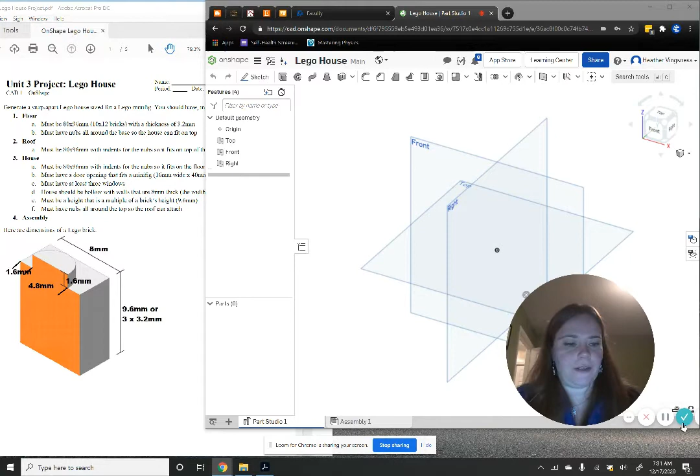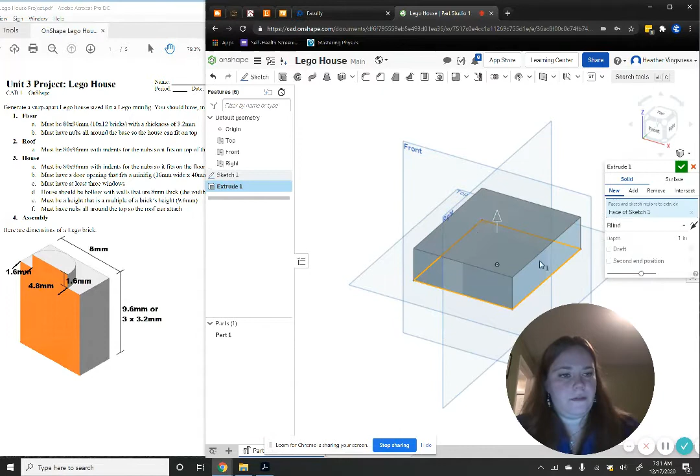We're going to start by building the floor of the Lego house. I'm going to create a sketch on the top layer of a center point rectangle. It has to be 80 by 96, which is 10 bricks by 12 bricks. So I'm going to type in 80 millimeters and 96 millimeters. It should be a thickness of 3.2, check. I'm going to extrude this to 3.2 millimeters.

It looks like my drawing is set in inches, so I don't have to type in millimeters each time. I'm going to change my units to millimeters.

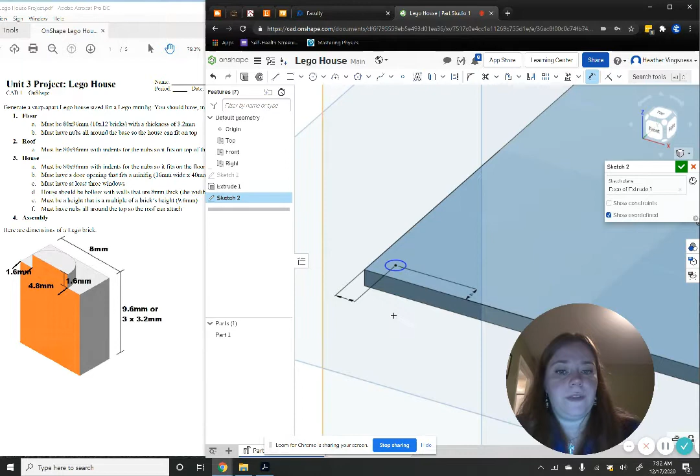Next, I want to create a pattern of nubs. So on the floor, I'm going to draw a circle. The Lego piece is 8 millimeters by 8 millimeters, which means the circle I drew needs to be 4 from this side and 4 from this side. That way it's evenly spaced in the center of a hypothetical nub or Lego piece. The diameter is 4.8 millimeters.

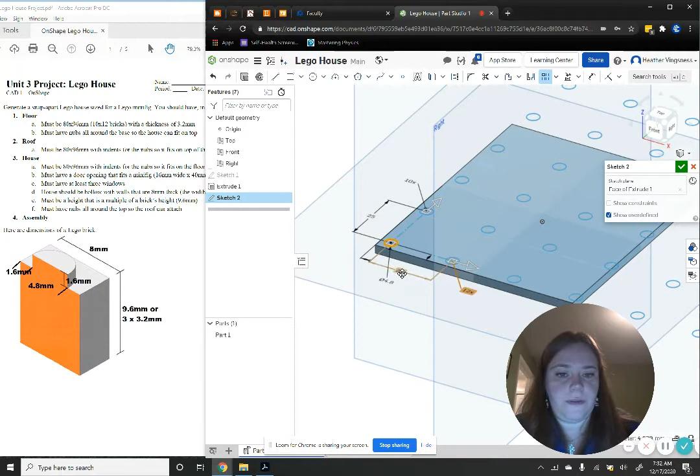Lastly, I can create a rectangular pattern of this part. I want to have 10 of them this way, and 12 of them this way. The distance between them is the width of one Lego brick, which should be 8 and 8. Oh, it looks like I swapped them. This should be 12, and this should be 10.

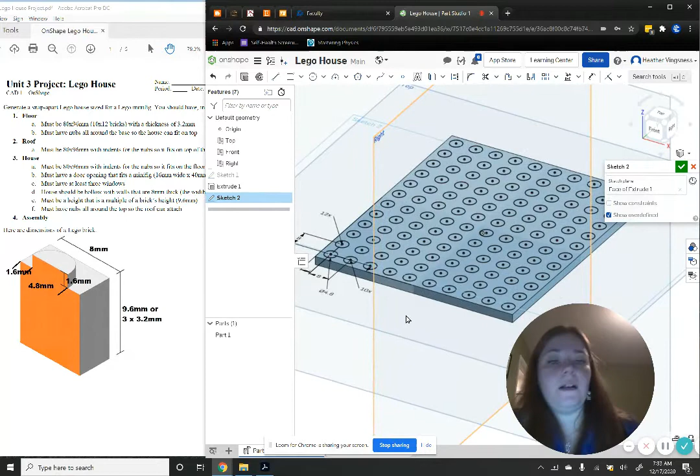So I don't need all of these nubs, only the ones on the outside. When I click to extrude, I don't want to extrude all of these. I'm going to X out of that. I want to click only these. Hold tight while I click all of these. If something happens and you accidentally click the whole sheet like this, all you have to do is X out of that most recent one. You don't have to start over.

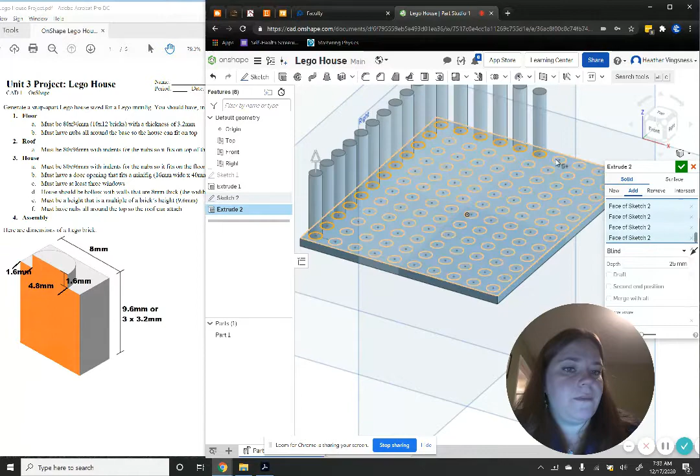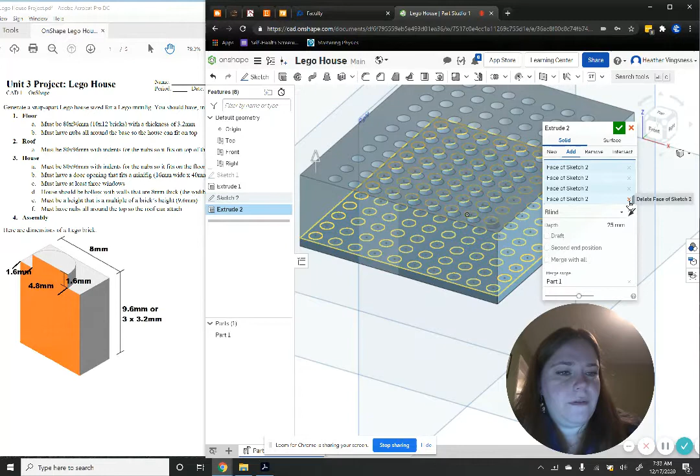See, I did it again. X out of that most recent one. Come on. There we go.

So all of these nubs are going to have a height of 1.6. Check. There we go. The floor is done. I'm going to rename my part floor.

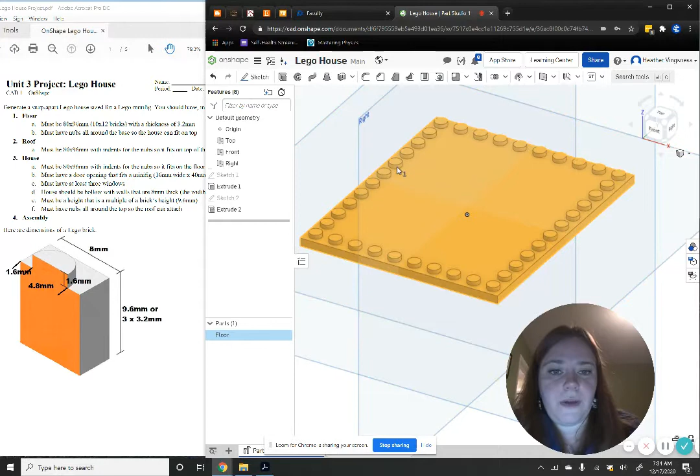Next, I want to build my walls. I want the walls to fit perfectly on top and have the same indentation pattern, so to save myself time, I'm going to build it right on top of this. I'm going to start a new sketch right here on this surface, and use my previous sketch and extrude it upwards just so it barely covers the top of these nubs.

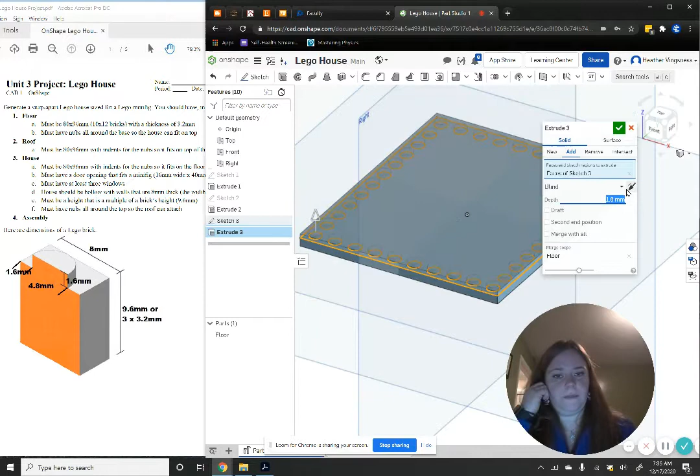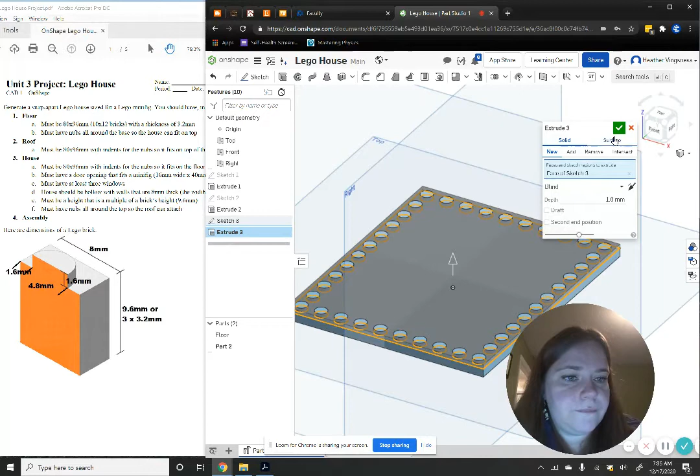I'm going to make it a new part. You can see it turns gray. And you can see that if I turn off the floor, this new part... let me fix that real fast when I extruded it. I want to extrude. There we go. When I turn off the floor, you can see my new part looks like this.

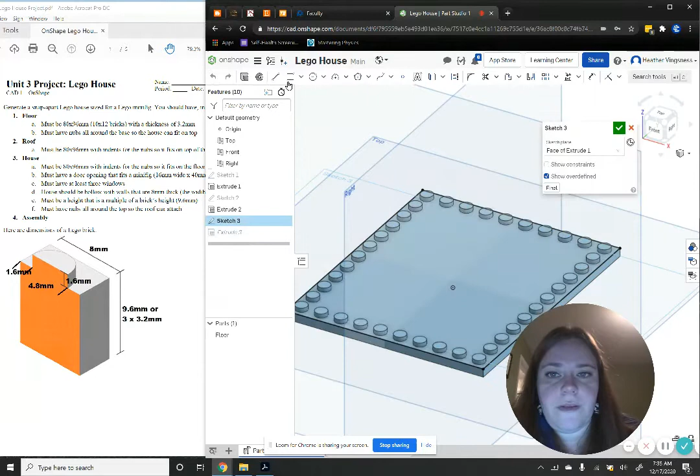You can see it has the holes indented right here. I want to draw the outline so I just get the walls. Let me do that real fast, and turn my floor back on. I'm going to go back to sketch 3, and draw a rectangle whose distance from each edge is the width of this brick, which is 8 and 8.

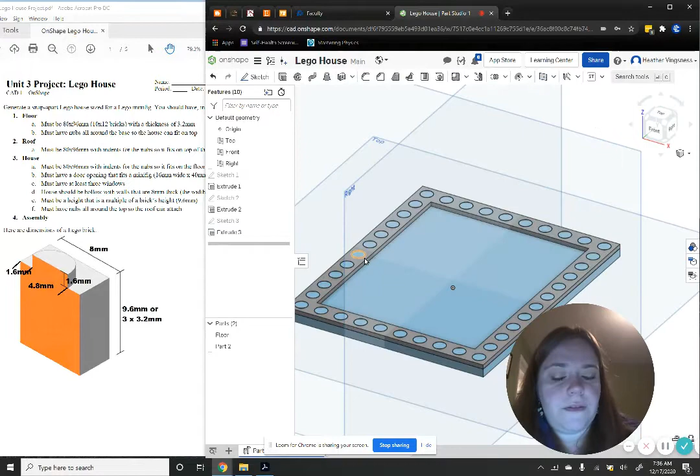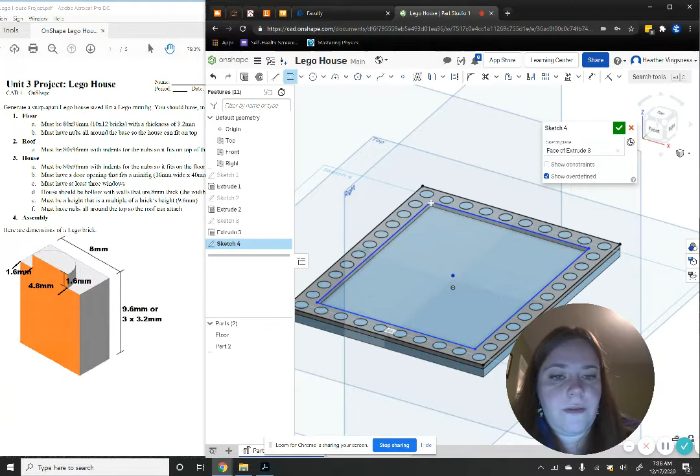Now you can see it's extruding just this outside so that my house has a hollow inside. Next, now that I have the indentations in the bottom of the floor, I want to make the rest of the floor solid. So I'm going to draw a sketch on top that is literally just this rectangle, and this rectangle. Check. I want to extrude that, not the holes. I want to fill in each of the holes if it lets me.

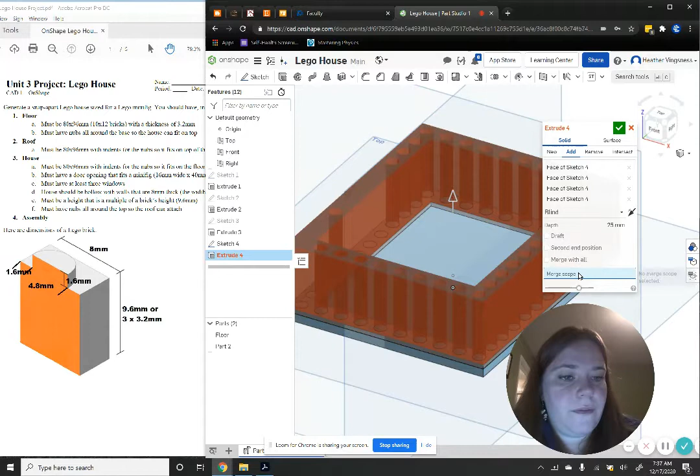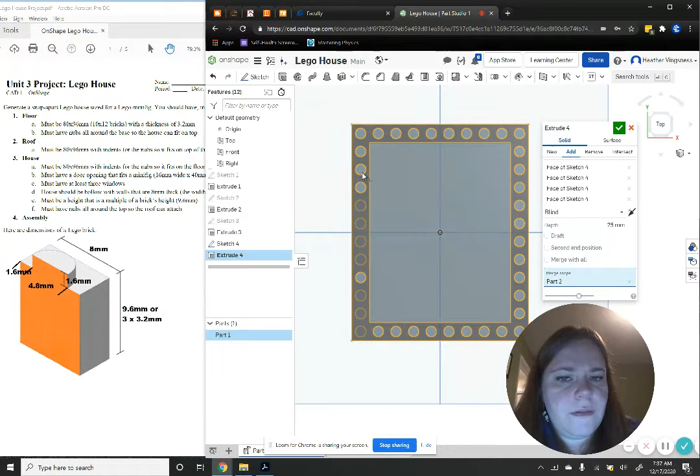I want to add it to this existing part and merge it with part 2, to combine right there. I want to click each of these holes. Come on. Let me see if I can do this a different way.

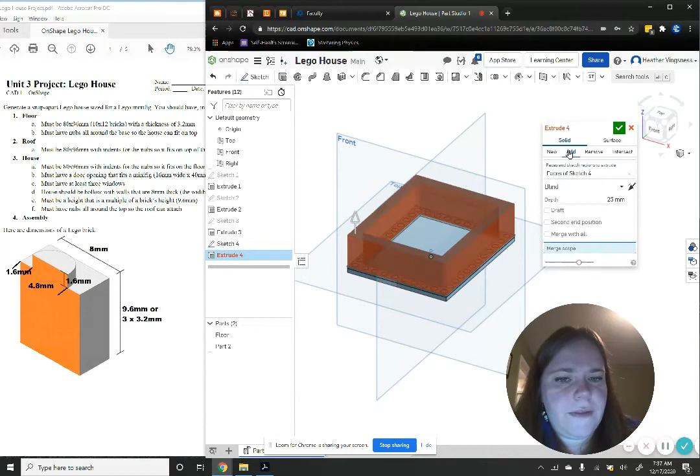My sketch 4 looks like this. If I extrude just sketch 4, there we go, no holes, perfect. I just clicked extrude sketch 4. Add it to the existing piece, merge with part 2. Now you can see it's gray. Perfect, and I can make it the right height.

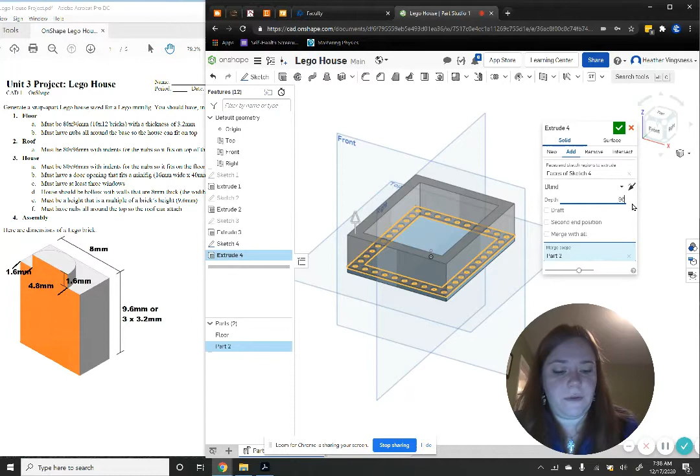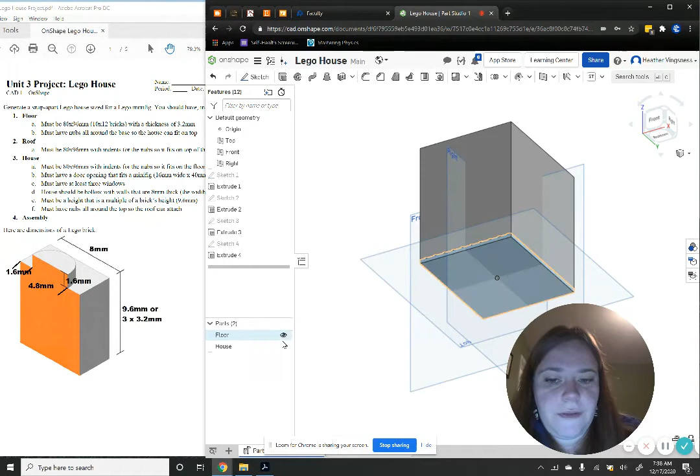The house has to be a height that's a multiple of a brick's height, which is 9.6. So I'm going to make it 96 tall, and then subtract the height of the nub I already extruded. 96 minus 1.6, there you go. There's my house. I'm going to rename this house. You can see that when I turn off the floor, my house has those nubs in the bottom that we created earlier, and this house piece right here.

Next, I want to put the pattern of dots on top. I'm going to start a sketch on this plane. I don't want to redraw that pattern because that sucked, so I'm going to hide the house and just click the Use button and grab this pattern and all these dots. I'm just going to go through and click all of these dots, and you can see that pattern forming up on the top.

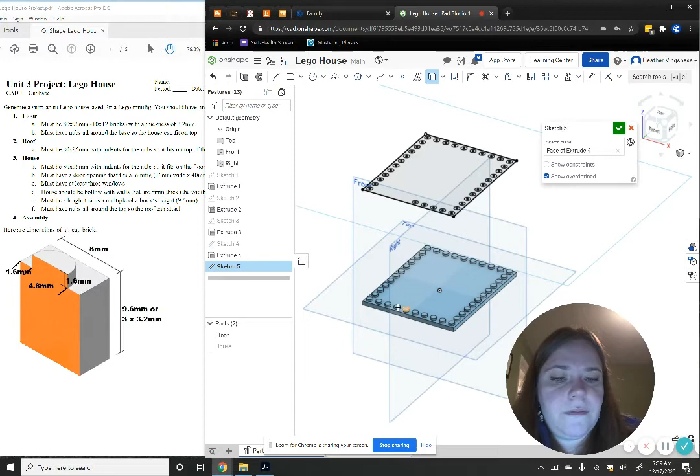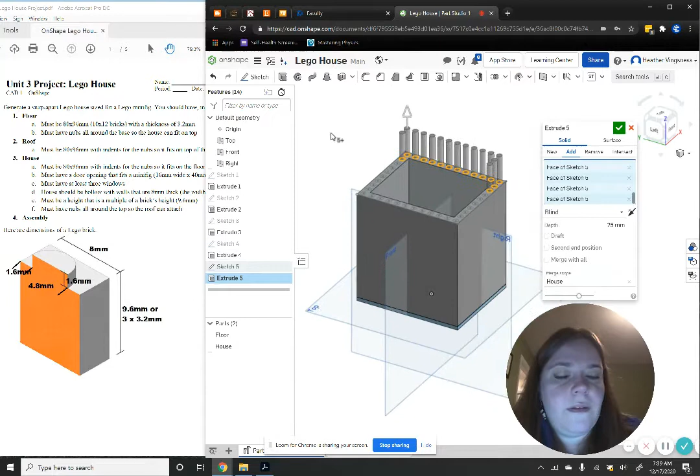When I turn my house back on, here's all my things. I can now extrude them. I don't want to extrude the whole face, I want to extrude just these dots.

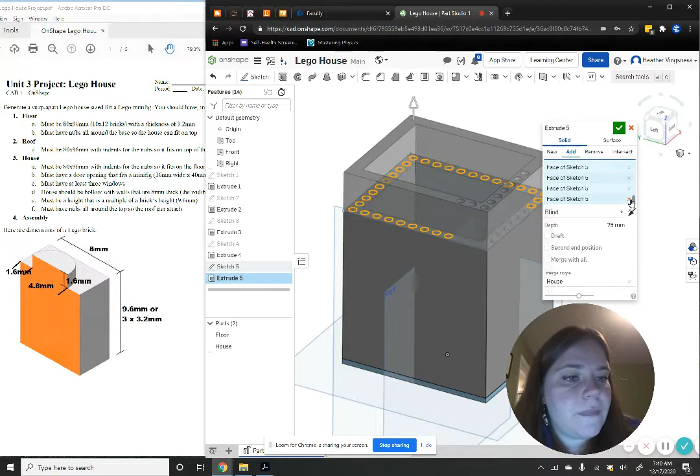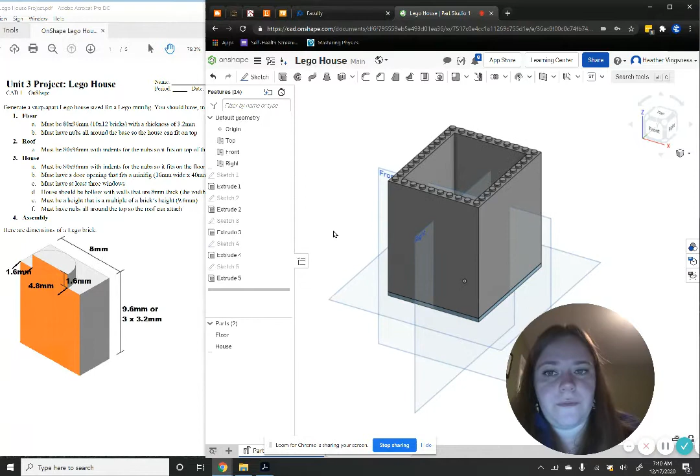Perfect, a height of 1.6. Now you can see that my house has nubs. If I were to hide the floor, you can see I have nubs on top and nubs on the bottom. We're going to use this same method to create the roof, on this surface right here, not on the top of the nub. I'm going to create the roof on this surface, and all I'm going to do is use this existing sketch 5, if it lets me.

So I want to extrude this whole sketch right here. Hopefully it'll give me those little holes. I want a new part, only 1.6, and I want to be able to see the holes through it. So I wonder if I haven't used all these dots. Let me see. If I hide these, what does my sketch 6 look like? Ah, it's just the house. I have to go back and click each dot, click, click, click. It's a little tedious, sorry.

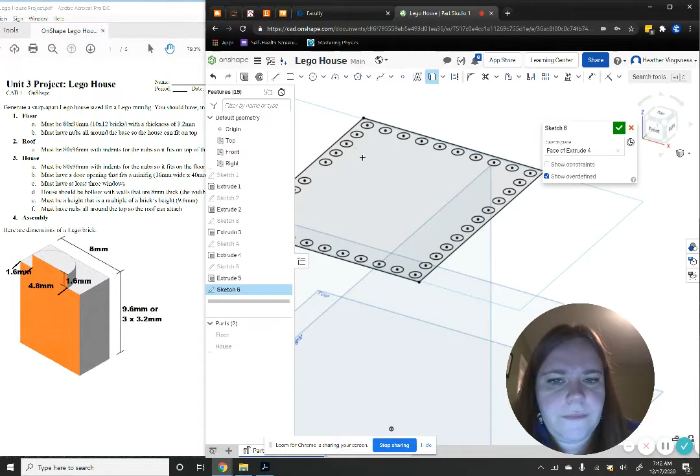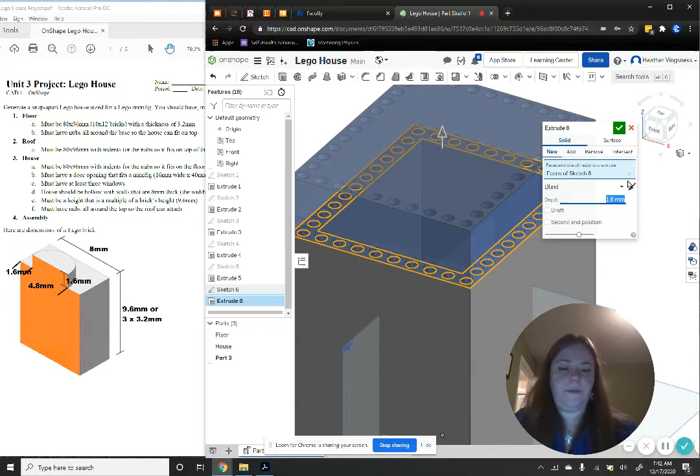You can see as I click that, a little black circle appears under each one, meaning they're going to be on the sketch I'm creating. Now when I hide these, you can see my sketch has all these circles. Oh, I missed one. There we go, perfect. Let me try to extrude that one more time. Extruding sketch 6. There we go, look at all these nice holes. I want this to be a new part because this is my roof, and just like last time, I only want to go up 1.6 so that I've covered all of these nubs and made the indentation in the bottom of the roof. I'm going to rename this roof.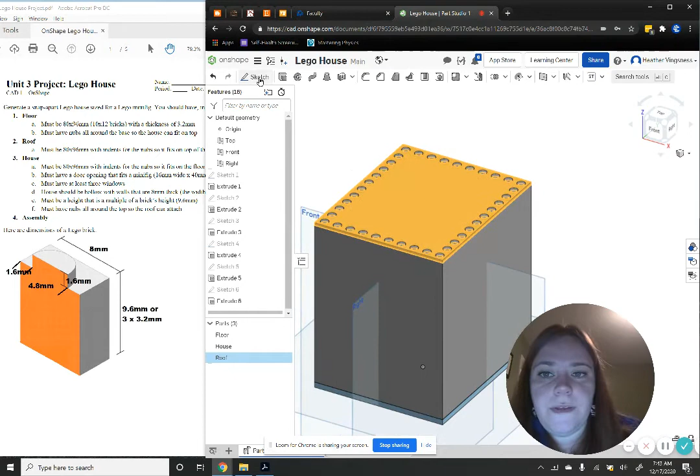Perfect, okay, so my last step is to make the roof pointy. I'm going to create a sketch on top of this plane of a rectangle this size. Check. I want to extrude this rectangle at a draft, that's what will make it pointy. Let's say, what does a 30-degree draft look like? I'll change the direction so it becomes a point.

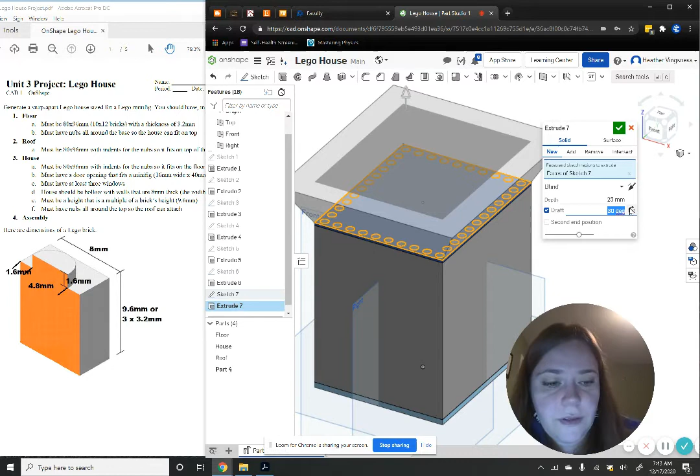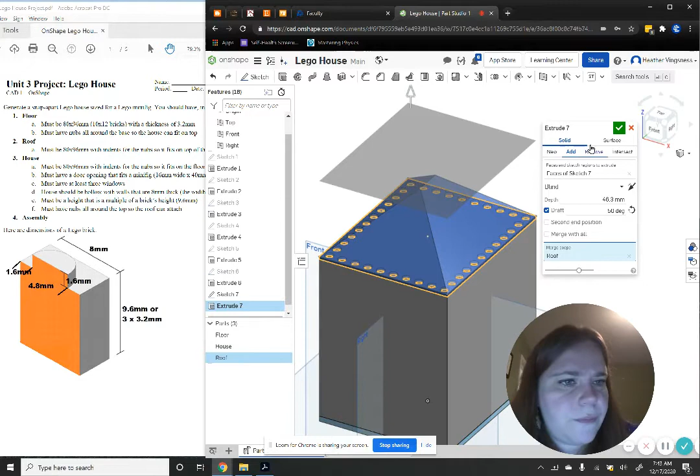It looks like 30 degrees might be too shallow. Let me try 50 degrees. Oh, perfect, see how my roof has a flat spot? I'm going to keep pulling upwards so it becomes a point. Oh, that looks good. I want to make sure I add it to my existing roof so it all merges into one part. Check. Ooh nice, there we go.

You can see as I hide the floor and the house that I now have a roof with indentations in the bottom that perfectly fit into the indentations of the house and the floor. My last step is to add windows and a door opening.

I'm going to draw a sketch on this side of a rectangle, starting down. Instead of a center point rectangle, I'm going to do a corner rectangle, 16 by 40. I want to center this, so I'm going to use my symmetric tool to click the left side, the right side, and the right plane that runs through the center of my house, and you can see my door is centered. I'm going to extrude this door to remove material.

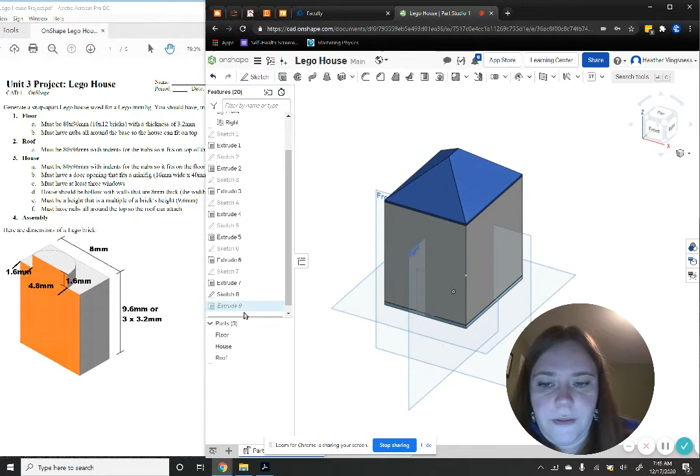Perfect, there's my door. I need 3 windows, so maybe I'll put some on the front. I'll put this one right here, this one right here, and go back and extrude them. Check, and then I'll put another window on this side. All right, my house is done.

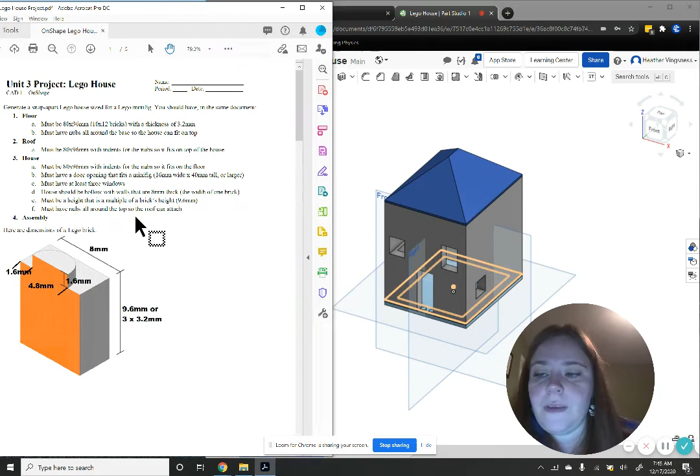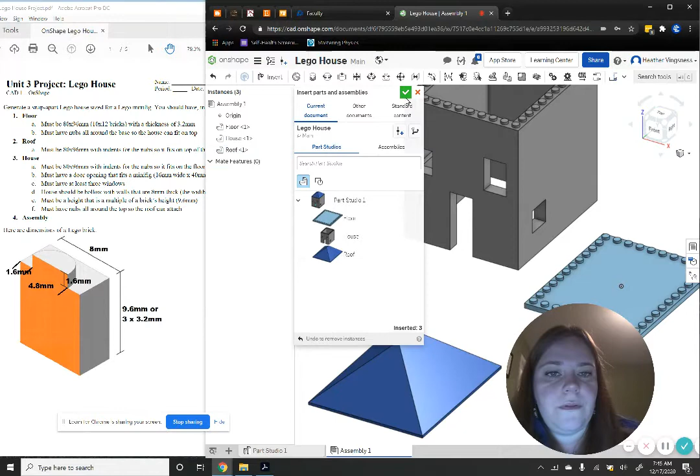My next step is to assemble my house. I'm going to go down to my assembly tab and insert the 3 parts. Here's my floor, here's my house, and here's my roof. Check. I'm going to fix my floor in place so it doesn't move, so my house has something stable to work off of, and all I'm going to do is fasten this spot.

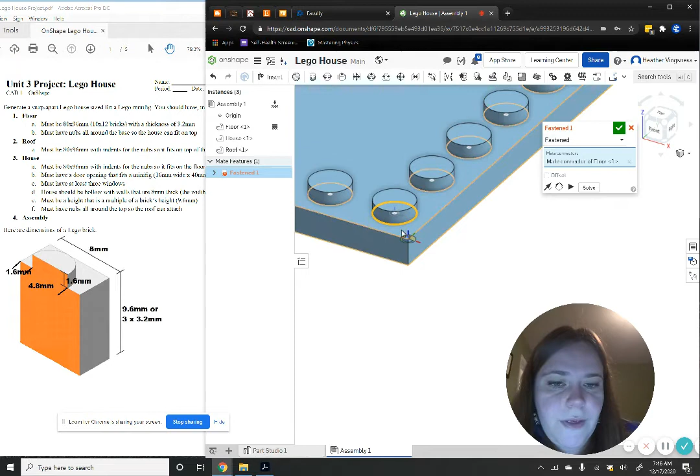I want to make sure I'm fastening the bottom of the circle instead of the top. I want the bottom of this, which is like this base layer right here, to match the inside of this hole. So not that spot, but, oh, does it let me? Maybe I'll try a different location. How about instead we do, this will be easier, no, delete this. I'm going to undo that, that was no bueno.

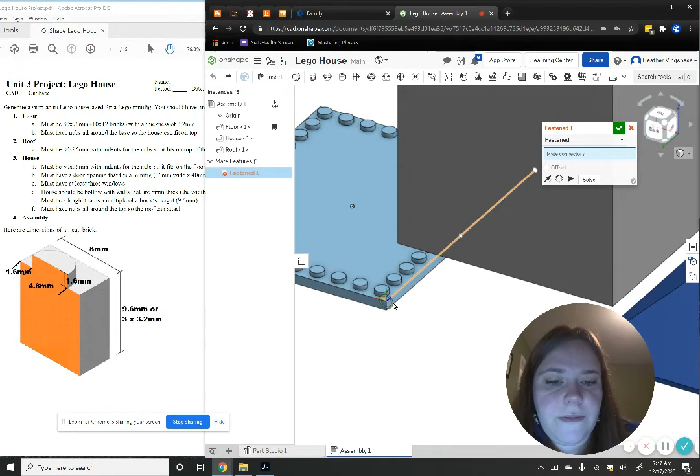All right, I'm going to try again. I'm going to fasten, how about I fasten this corner? See how it's flat? Not like this, I don't want this plane, I want that plane. How about I do that corner with this corner? Will it let me? I want to be flat, flat, flat, give me flat. There it is.

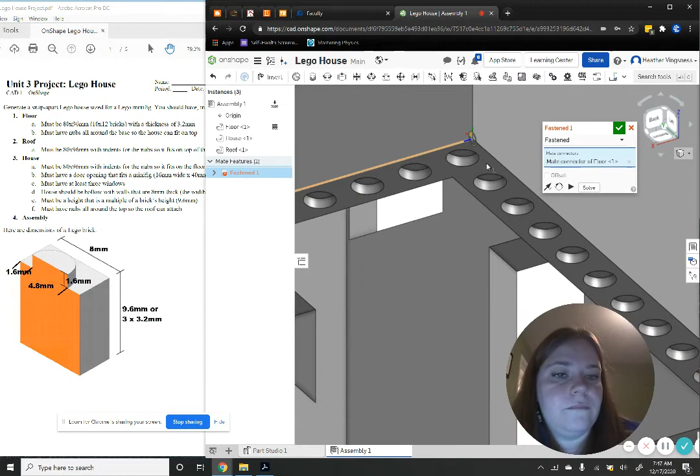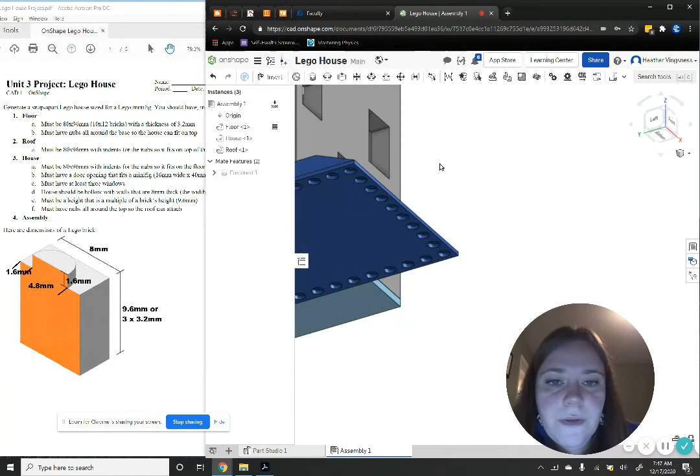Perfect, let's see what it looks like. There it is, you can see they're fastened together. If I grab it, it doesn't move, and you can see it perfectly fits on top. I'm going to do the same with my roof, grab this corner, trying to grab that spot. Perfect, I'm going to match it to the same spot on top, right here, trying to get... there it is. Perfect, all right, everything's fastened together.

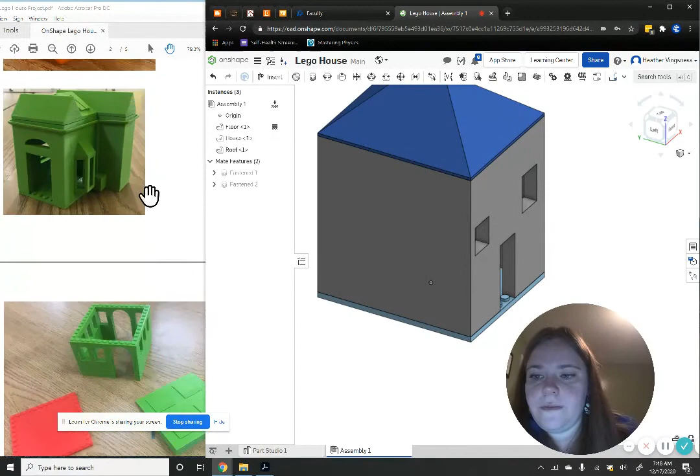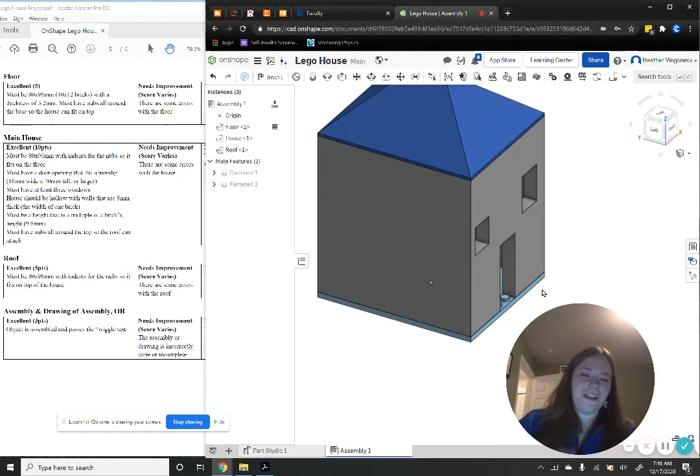Let's check our rubric. We have the floor, the right size, nubs around the base. We have the house with indentations. It has a door opening, it has 3 windows, it's hollow, the walls are 8 millimeters thick, it's the right height, there's nubs all the way around the top. The roof has nubs. The object is assembled, and it passes the wiggle test, when I click each part, it's not moving. Nice work guys, we have done our Lego house.